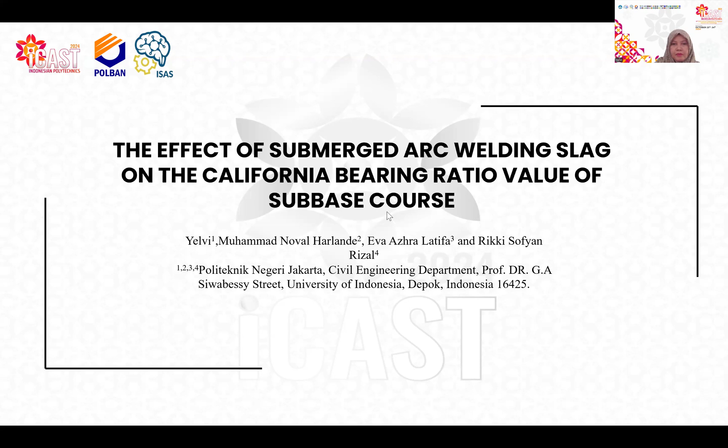I would like to present our research about the effect of submerged arc welding slag on the California bearing ratio value of subbase course. Okay. The contents in this presentation are introduction, objectives, method, results and discussion, and conclusion.

The background of this research is that currently there is a high demand for aggregates in the civil engineering industry. Innovation has been carried out for foundation materials using industrial waste. The utilization of waste serves as an alternative solution to address this issue.

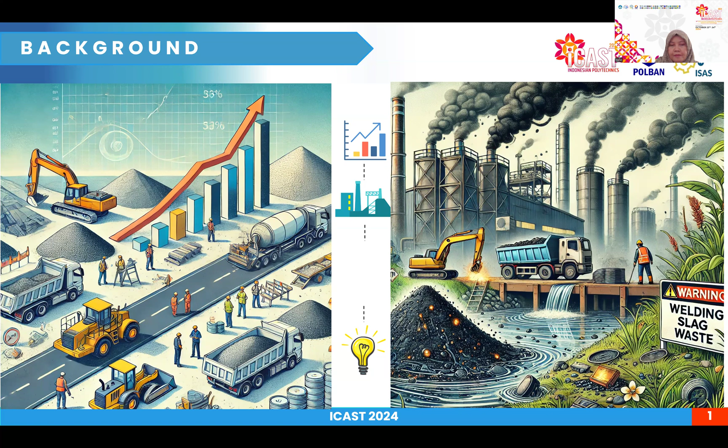The objectives. This paper examines the behavior of the CBR, California bearing ratio, value of subbase course materials when substituted with SAW slag waste to explore its utilization potential and also reduce steel fabrication waste. The waste used in this study originates from welding waste produced by the steel industry employing the submerged arc welding, or SAW, method.

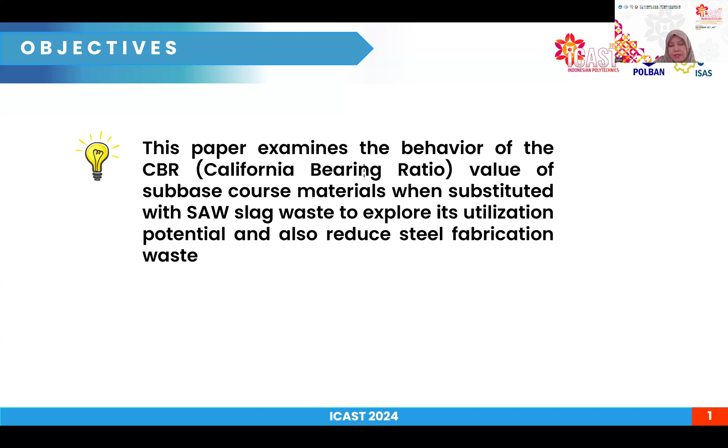Several studies have used slag material waste, which is a byproduct of the submerged arc welding process. However, it has not yet been applied to road pavement structures. Previously, we conducted a study on the substitution of SAW slag in the base course with varying percentages of 0%, 5%, 10%, 15%, and 20%. The results of the study indicated that SAW slag at 15% content is recommended as the optimum percentage for substitution in the base course.

Okay, methods. These pictures show the flowchart of our research. These flowcharts illustrate the research process from literature review to obtaining results. A series of laboratory tests were carried out, such as specific gravity, unit weight, bulk density, abrasion, compaction, and California bearing ratio test. The experiments were conducted on subbase materials, SAW, and mixtures of subbase material with SAW substitution.

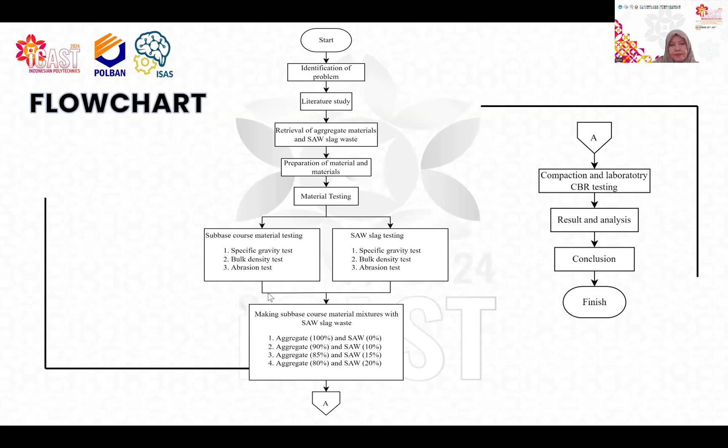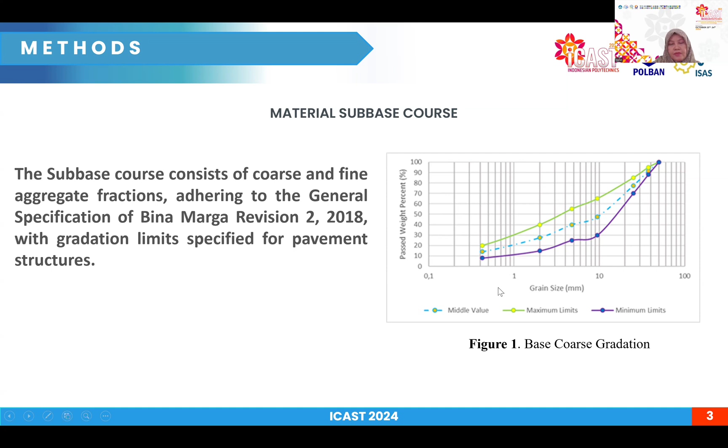Material subbase course. The subbase course consists of coarse and fine aggregate fractions adhering to the General Specification of Bina Marga Revision 2 2018 with Indonesia National Standard, with gradation limits specified for pavement structures. Okay. This research employs the median values from the specified limits for the subbase course materials, like what we see in Figure 1. The subbase course material is from Subang, West Java Province, Indonesia.

Submerged arc welding, or SAW, slag. This slag solidifies into coarse aggregates as it cools, with any unmelted portion remaining as fine particles. By utilizing this material, we can reduce road construction expenses and minimize production waste, contributing to the goal of achieving a low emission zone and sustainable development.

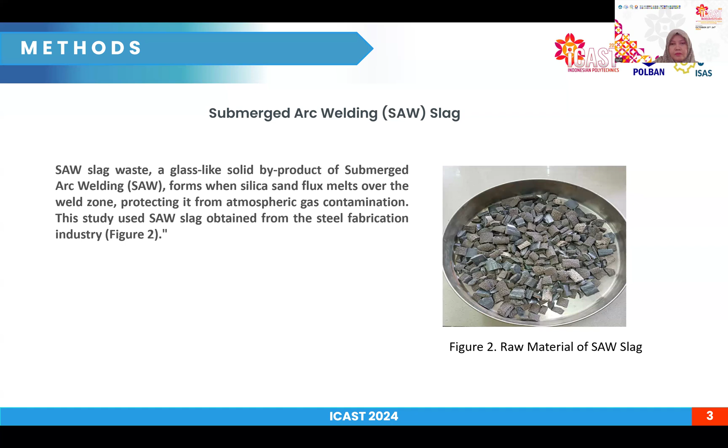All testing refers to the Indonesian National Standard, which is based on ASTM standards. Based on previous research findings, the substitution of SAWS in the subbase course was 0%, 10%, 15%, and 20%.

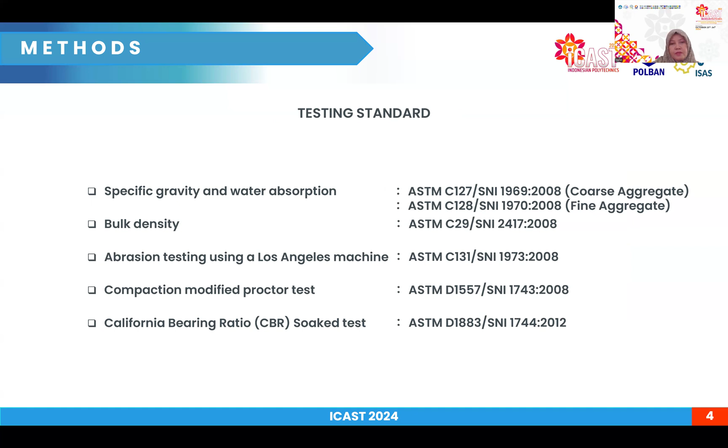Results and discussion. The material properties. Material properties were assessed through specific gravity, bulk density test, and abrasion test on subbase course material comprising coarse and fine aggregates. And SAWS content was adjusted to the dry weight of each test sample. The results of this property test determine the outcomes of the compaction and California bearing ratio test, which we will examine in the next slide.

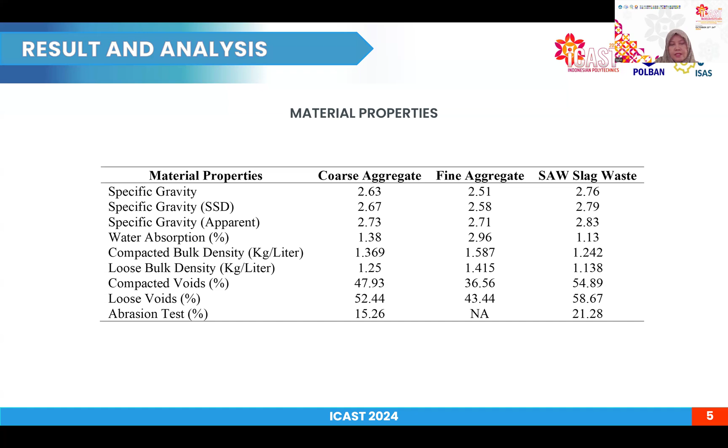At 20% SAW waste substitution, the dry density decreases. This is because the voids in the SAW waste are larger compared to the subbase material, and the SAW waste particles have an uneven texture.

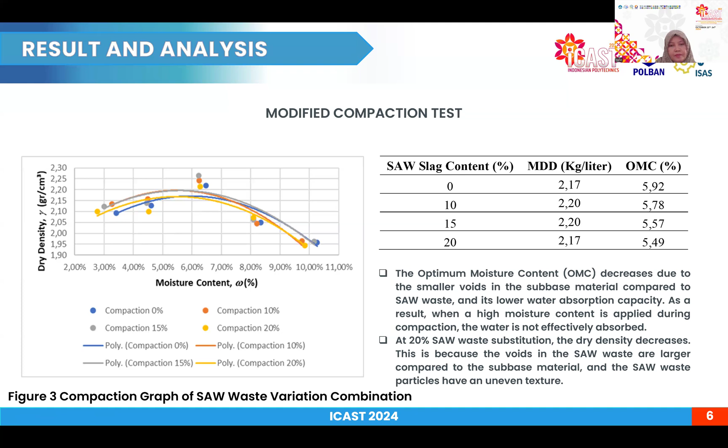And this is the CBR design. The California bearing ratio test was conducted under soaked conditions. Water was added based on the optimum moisture content from the compaction test. The CBR value is essential for determining the thickness of pavement layers. To acquire the CBR value required in road design, the design CBR value must be established. This process involves plotting the correlation between the CBR value and dry density for each compaction effort, which is linked to the compaction curve as shown in Figure 4.

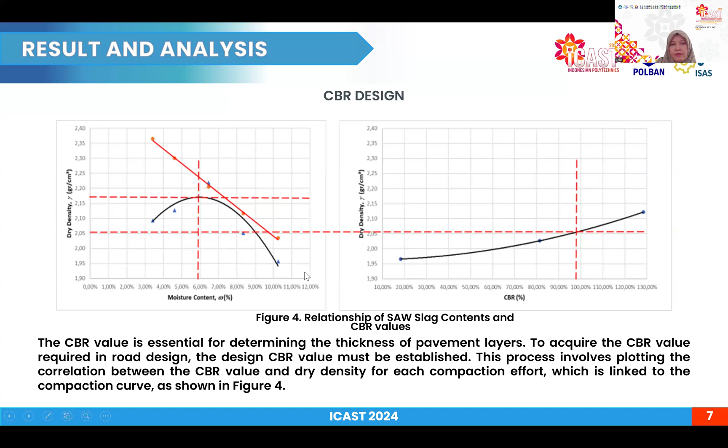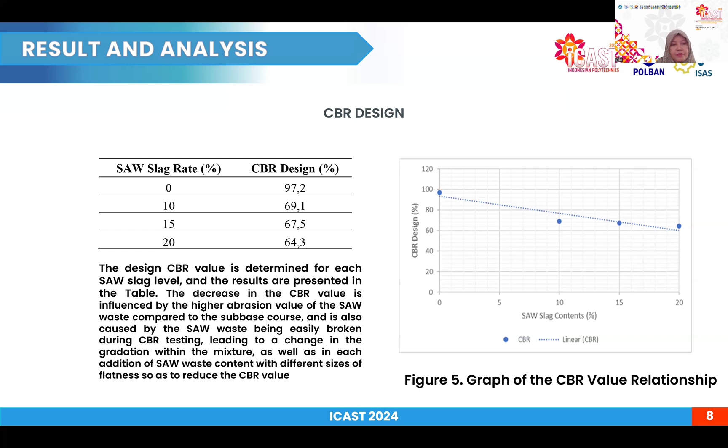This is the result of the CBR design. The design CBR value is determined for each SAW slag level, and the results are presented in the table. The decrease in the CBR value is influenced by the higher abrasion value of the SAW waste compared to the subbase course, and is also caused by the SAW waste being easily broken during CBR testing, leading to a change in the gradation within the mixture, as well as the addition of SAW waste content with different sizes and flatness, so as to reduce the CBR value. Okay.

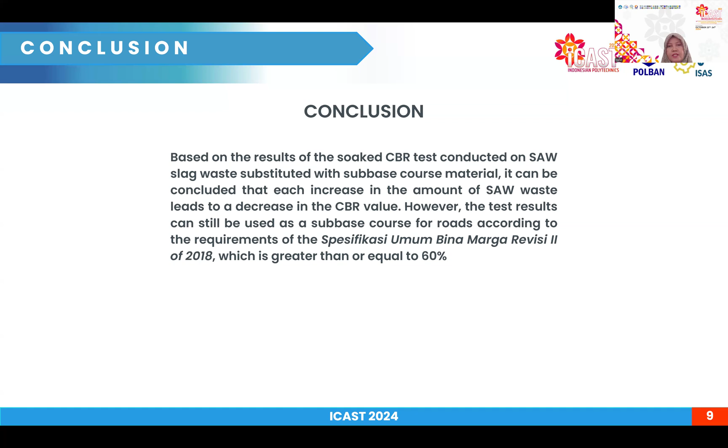Conclusion. Based on the result of the soaked CBR test conducted when SAW slag was substituted into subbase course material, it can be concluded that each increase in the amount of SAW waste leads to a decrease in the CBR value. However, the test results can still be used as a subbase course for roads according to the requirements of the Spesifikasi Umum Bina Marga Revisi 2 of 2018 and the Indonesian National Standard, which is greater than or equal to 60%.